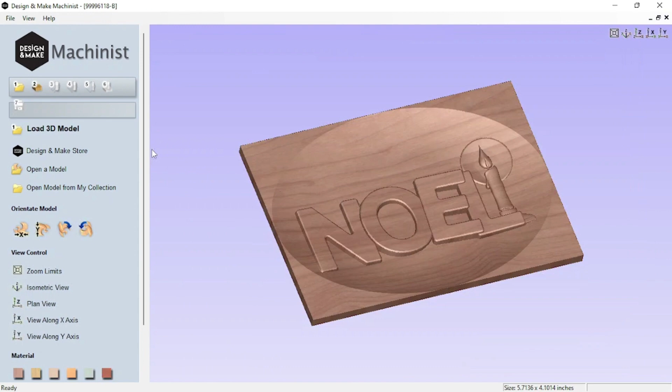We've already gotten past Christmas, so let's go with a different one. Let's go with this. I think it's this one right here. There we go. Yeah, let's do that. So you can see right here, this is going to be some kind of little swan, I think.

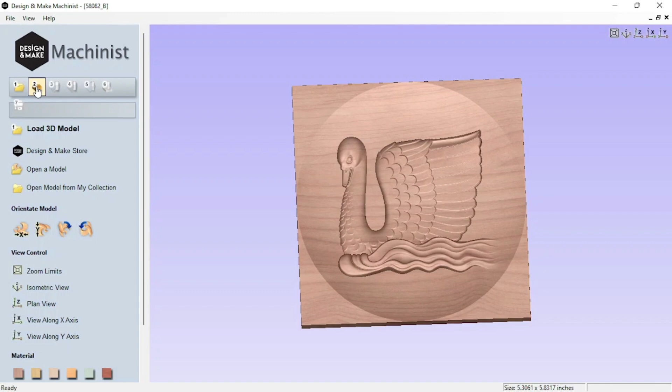Over here, this is already changed to your next step. You can choose what material you want it to look like. When you go to output it, I don't think that really matters. But then you just hit this little next button right here, and it asks you what dimensions you want.

I think I'm going to do like a 5x5. So we'll see what 5. Let it automatically update. You see, here it says length, width, and height, and then it also says link width and height, or scale depth with X and Y.

And then here where it says your datum position, it's just like you would do in Vectric. You choose your datum location, same as you'd choose in VCarve Pro or Aspire. It looks exactly the same almost. And then you choose whether your Z is going to be on top or on bottom, and usually that's right here. Thickness of my material, I think, is 1/2 inch that I want to use.

I'm going to be using some cedar that I have laying around, so we'll go 0.5 on that. And then right here where it says gap above, I always leave a little bit, let's go 0.02. The reason I do that is that allows for any inconsistency in your material, because wood's not always perfectly flat. So if you tell it to start the model 0.02 below, that gives you a little bit of play in that, and it'll give you a nice even relief carving.

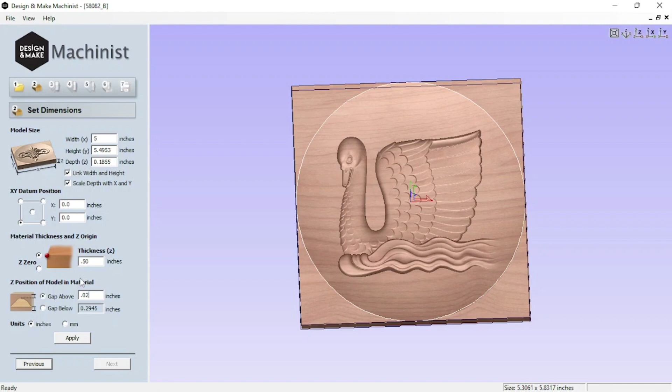Then you hit apply, and it just takes you to step 3 and 4. Since I'm using cedar and I know it's pretty soft, you have to go to next right here. It asks you if you want to create a roughing pass. I'm not going to do that for this because I know cedar is pretty soft, I should be able to cut it pretty easy. So I'm just going to say next because I'm not doing that.

What I've done here, I've already added it, but I'll show you. This is doing your finish toolpath. That's where we are right now. So you click right here where it says select. This is where you select your bit.

I'm using a ball nose that I've already got, and I've set it up as a 1 millimeter because that's what it is. The stock ones that come with the Machinist software are this 0.25 to 0.5, the 0.25 and the 0.125, and then the 3, the 6, and the 12 millimeter end mills, and then the 3 and the 6 millimeter ball nose. I added the 1 millimeter ball nose, and you can do that by just hitting new down here, and then you type in your parameters.

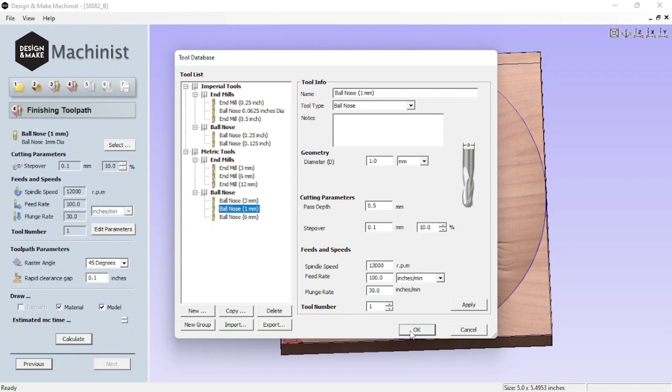So we just go ahead and click OK. And for effect, you can change the angle right here. We'll just leave it at 45, why not? And then when you go to calculate, this is actually going to calculate your tool path. So you just hit calculate.

And it takes a little bit of time, and I'm running on my laptop.

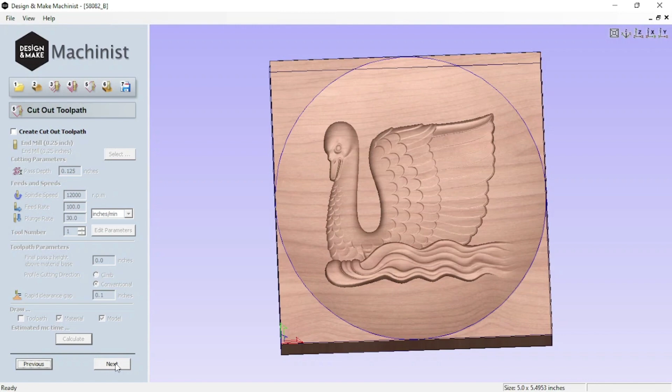All right, so the blue line is your tool path. You can go right here and click that on and off, and you just hit next. Then it's going to ask you if you want to cut it out. For this demo, I'm not going to cut it out, I'm just going to do it. You could do a cutout if you wanted to, but then all it's going to do is cut out around the model right through here. But since we're not going to do that, just going to go next.

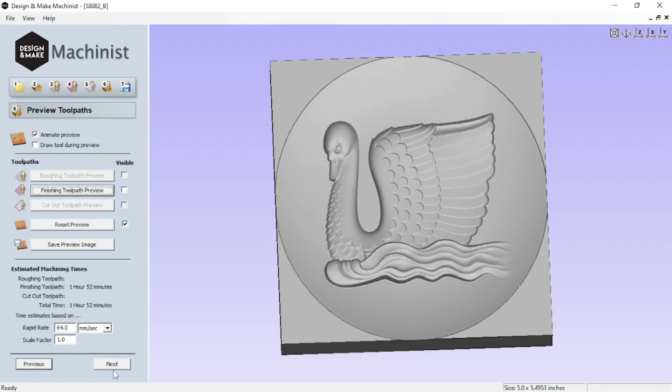You notice that this over here is all gray. What you do to preview that is you can just hit right here where it says preview toolpath, and it's going to give you an animated thing of what it's going to look like. Just click next from there.

So I just use that, and I've got mine set up in inches. You just choose your post processor here, there's a whole list of them. Some people may not like using the X-Carve, but I do.

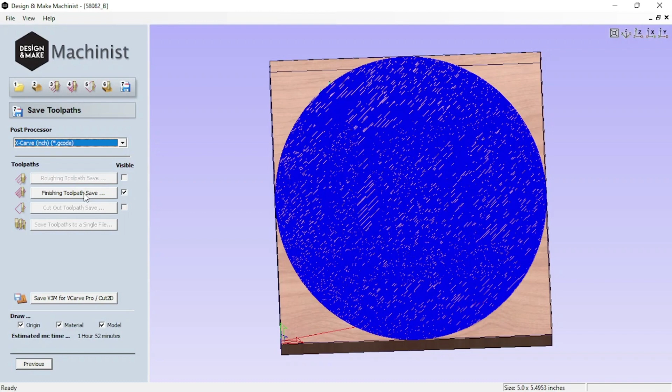And then you just go right here where it says finishing toolpath and you output it. I want to put this into my CNC files. I think I have one that I call demo. Yeah, right there. Let's call it Swan.

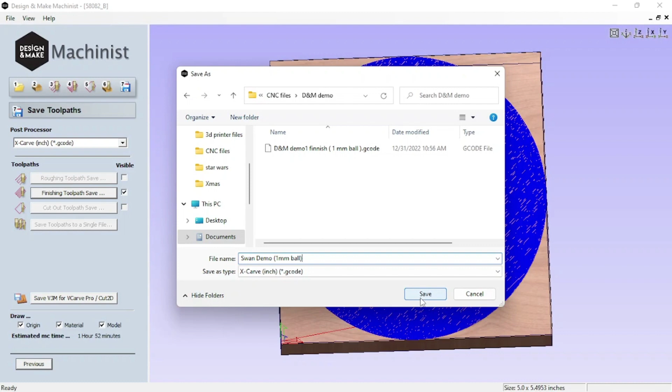And then one thing that I always do is I use these parentheses, and I'll go with a, call it a 1 millimeter ball. That gives me an idea of what I'm actually using when I save my G-code. Sometimes I'll put in sizes and stuff like that just so I can keep up with what's what. And then you hit save from there. And that's all it is to design it in the Machinist.

In just a second, we're going to go over to the machine and we're going to get it going, and I'll show you what that looks like.

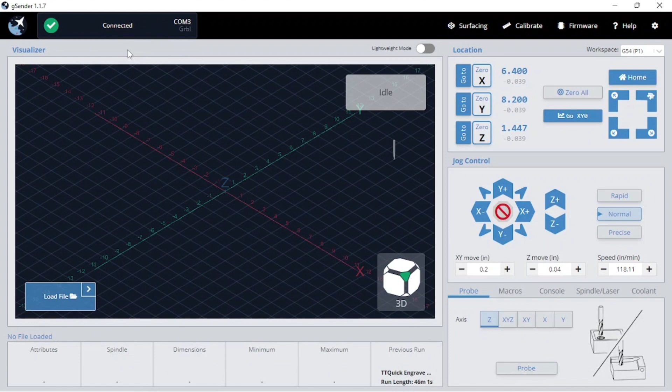So what I normally use with the little ComGrow Robo is I like to use G-code or G-Sender. It's actually put out by the company that makes the Long Mill. It's actually a pretty good little G-code sender. But anyway, so you pull that up. I've already got mine connected, homed, and all that. I'm not going to go into how the G-code sender software works, I'm just going to show you how to load the file, and I'll set it up and we'll go from there.

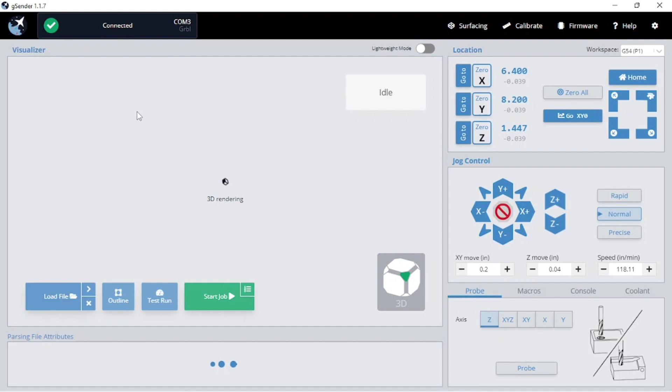So basically, just like anything else, you would pick your G-code file that you want to load in. It loads it in, there it is. You can see the demo of it if you want to. And from that point, we're just going to get things set up and we'll carve. Let me take a minute or two and I'll have it set up, and I'll kind of record this and let you see how it goes.

So there you go, we just finished a little carve, and it's kind of a simple one, but I hope it gives you some idea of what can be done with the design and make Machinist. Hope it helps some of you people that are just getting started.

Like I said, I did this mainly for those that are starting with the smaller machines, wanting to get into some of this stuff. This is a free way to get in there and get your hands dirty a little bit with playing with 3D models and getting some idea of the techniques behind how you actually make one of these carve out on your machine.